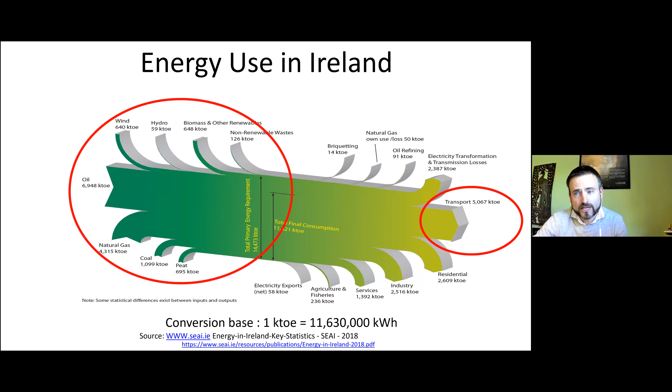Energy use in Ireland is quite stark when you look at it. This is a Sankey diagram by SEAI. Our energy inputs here on the left, and we look at oil, which mainly goes into transport. Transport of the energy sector covers about 37% of CO2 emissions. That's a lot. That's a big sector of our economy that has to decarbonize, a big sector of our daily lives that we have to develop and understand to try to get reductions in those carbon emissions.

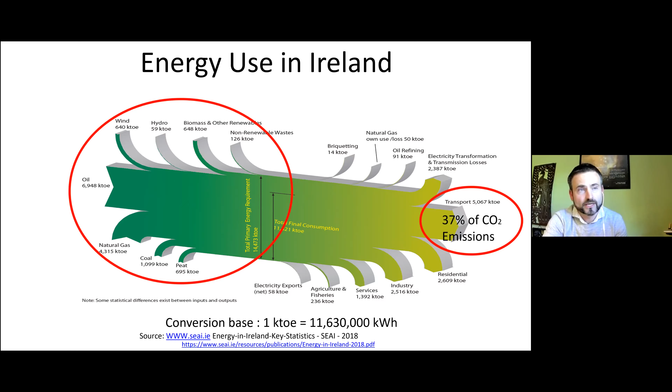Built environment is really difficult to understand because you have to think about your home and the expense and costs around that. But transport, even as an individual or as an engineer at any level of society, it's also kind of a little bit 'will I just change my car to something that's a little bit better?' I want to tease out that expectation here today a little bit, and look at what we could do, should do, and see if you agree with me and maybe have a bit of discussion around it.

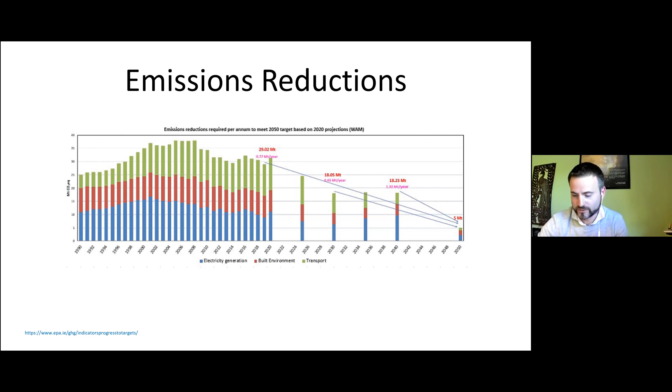This is what I want to really get through: tailpipe zero emissions is important, and then life cycle low emissions, or as low to zero as we can, is important. So we're aiming for an A0, it's called, in relation to a CO2 band in a vehicle, we'll say. And if you look at an A0 band, the only options you have are hydrogen and electric.

Interestingly, both these vehicles that you see in front of you here - the one on the bottom is the Toyota Mirai that I drove just before lockdown, actually, in the Netherlands, filling it up with hydrogen as I was on a 150-kilometer drive around with a colleague in it. And the car up the top, the electric vehicle, is my own vehicle. It's a Hyundai Ioniq, fully electric.

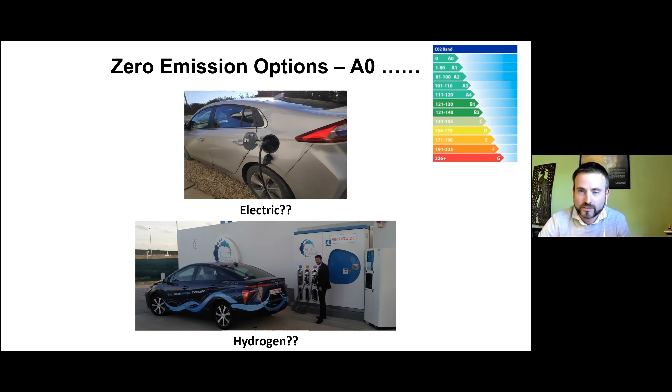So let's dive in, and we're actually going to look at electric vehicles first. From a market point of view, Ireland's actually not bad. Usually we're at the bottom 10 in the world or something, but actually in relation to market share in 2019, Ireland was quite good in relation to the amount of electric vehicles sold within our market.

We're nowhere near the likes of Norway, but every other Western European country is fairly similar. However, we have a very small population, a fleet of about 2 million passenger vehicles. So from a global percentage of amount of vehicles, we're actually very low because other countries are bigger and have a lot more vehicles. But from a market share, we're quite good.

So to date, about 9.5 million electric vehicles are on the roads, and 2.3 million of them were sold in 2020. Actually more than half of that number, 1.2 million I think, was sold in China alone in 2020. So these are the numbers you're working with.

Now let's put that in perspective. The global fleet of vehicles is about 2.2 billion. So electric vehicles are very small and are pretty much doing zero impact today, and probably won't do much impact in global emission terms from a vehicle point of view.

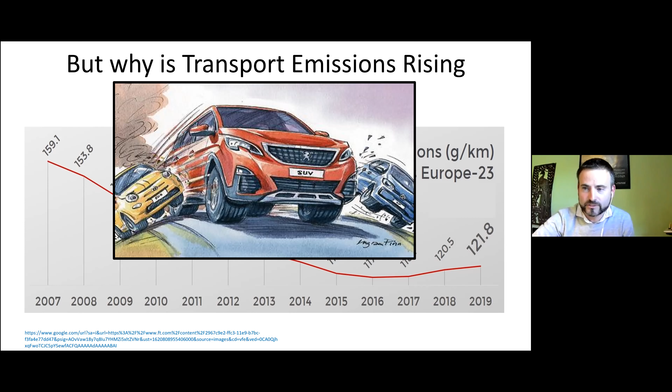So let's look at hydrogen. Now, the interesting thing with EVs that I looked at was EVs, electric vehicles, battery electric vehicles, mainly focus on passenger car market. And the transport system is way bigger and way wider, and we're more diverse than just passenger cars. So hydrogen always tends to widen that net, and it focuses in on buses, trucks, and passenger cars and logistics vehicles.

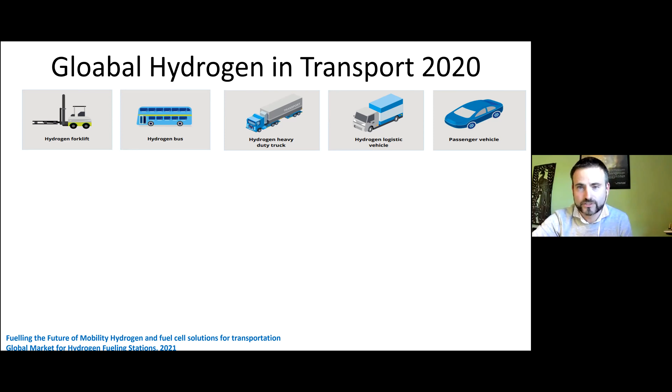Interestingly, globally, there's less than 600 hydrogen fueling stations across the world in 2020. And again, you could name, or I can name the countries: California, Germany, South Korea, China, Japan, and maybe somewhere next will be UK and France and other countries, Austria, have the fueling stations. And then there's a splatter of fueling stations across many other OECD countries.

But actually, if you look at the numbers of vehicles on the road, well, they're very, very small. We thought that 9.5 million EVs, battery electric vehicles, was small. Fuel cells are tiny - so you have 15,000 vehicles, again, mainly sold in the countries I mentioned, about 2,000 buses, mainly in China, and 1,500 trucks, mainly around Europe and China. And 30,000 forklifts, actually mainly in the US, believe it or not. So it's kind of interesting to see that the numbers are really small.

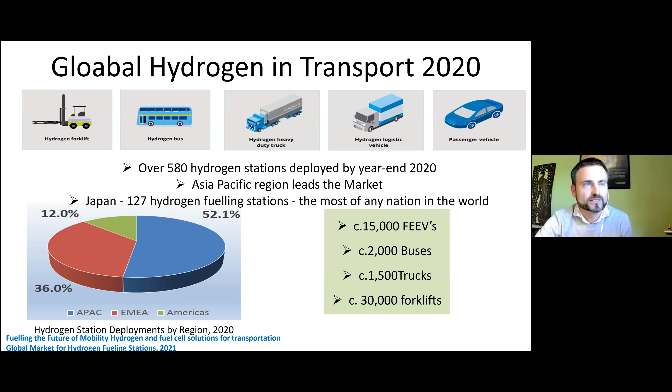And we can have the discussion around costs of hydrogen later if that's of interest.

So hydrogen going on to 2030, well, there's lots of stuff being planned. If you look at everything, between all the plans coming together across different countries and regions - US, Europe, China, and Japan - there's lots of vehicles aiming to come on. A lot of them are passenger vehicles, but there's a lot of buses, trucks, and trains all set to grow in the market, take up market share. If you fueled all these vehicles that have been pledged by these countries up to 2030, you'd effectively equate to half of Ireland's entire carbon emissions reduction across the world, assuming your hydrogen's green.

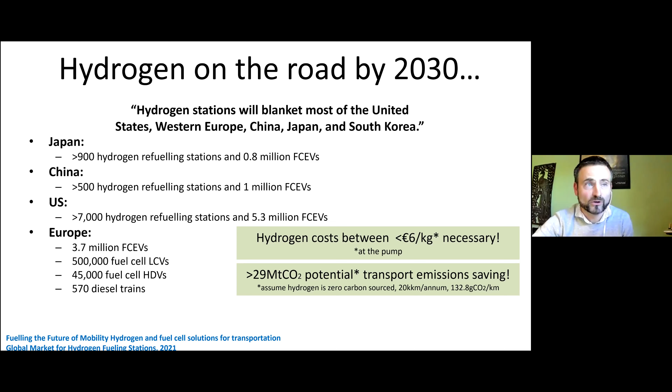And for the sake of conversation, I will be assuming all the hydrogen is green in my conversations from here forth.

So let's look at the hydrogen electric vehicle market in Ireland. Well, there was none in 2018, there was none in 2019, there was none in 2020, and we don't expect any in 2021.

So what we do expect in hydrogen is that cars isn't actually the focus. This is the whole idea I'd like to have a debate around today - is actually decarbonization the idea. And if you want to decarbonize, should we concentrate on Ireland's 2 million car fleet, or should we concentrate on the 100,000 trucks that create 25% of the 37% emissions in the transport industry? So I think from a decarbonization point of view, we need to decarbonize the heavy goods vehicles and reduce the amount of vehicles in our fleet.

So where we see hydrogen vehicles certainly is buses, trucks, and fleets of cars - not necessarily individuals driving cars, but fleets of cars are certainly a road where hydrogen should go.

So again, for the policy people in the room, what should we focus on? Well, when you look at the array of transport in our society, a key thing is the normal thing of decarbonization - that's the only thing we need to think about. And the things we should focus on are the things that don't have carbon connected to them - active travel, electric scooters, electric bikes, and active mobility.

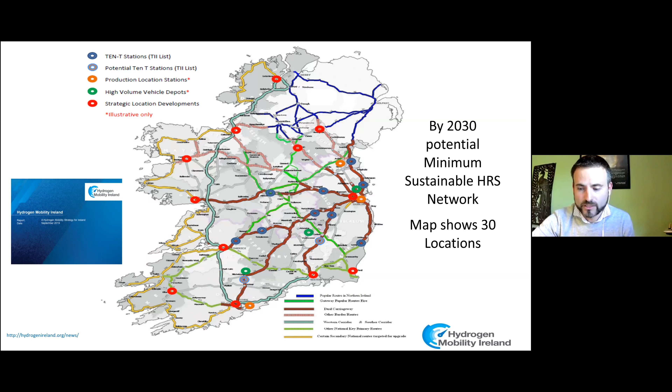What we've done is we've engaged with a lot of the truck industry in Ireland, and we've asked them a number of questions around zero emissions vehicles, or as you transition to zero emissions, what are your highlights. It's very funny - the truck industry is very pragmatic. They don't really care, is the short answer, as long as it works with their system, and their business can continue and even flourish because of their investment in the vehicle.

Now there's obviously a few caveats there - the vehicle cannot be too expensive and the fuel cannot be too expensive. But certainly what we see is that things like support, reliability, sustainability, backup supports, and the availability of the fuel are already more important than even the cost of the truck. So these are interesting anomalies, very different than an individual person buying a car - if you want to buy a passenger car, you usually look at where you put your coffee cup, and whether there are heated seats.

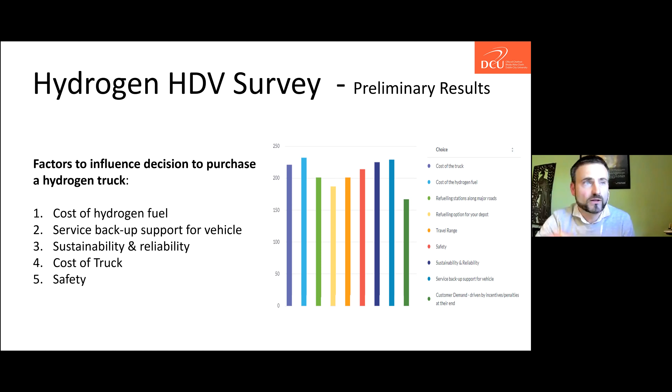Whereas heavy duty vehicle operation is very different, and it doesn't really matter if battery electric vehicles are available - that's what they should go for. But if they don't suit their range or logistic requirements, it makes sense that they'd all automatically flip to hydrogen once it's available. The other barriers people perceive for hydrogen are the cost of purchase of the vehicle, and vehicle performance and reliability question marks.

We're seeing this already in the UK, certainly in Northern Ireland, and in rollouts of bus projects across Europe and truck projects across Europe and even New Zealand. At the moment in 2020, 2021, there's only a few OEMs making these vehicles, but as I read in an article this morning, this decade is going to be the boom for zero emissions trucking, across both electric and hydrogen, which is really good.

Again, don't be biased, just buy the right one for your business. Other things, like all good truck companies need, are purchase grants. The question is you want to bring down a vehicle to be on par with an equivalent diesel vehicle, you want the motor tax to be equivalent, and you want fuel cost support. If it's too high, it won't be suitable for the business, so you need support there.

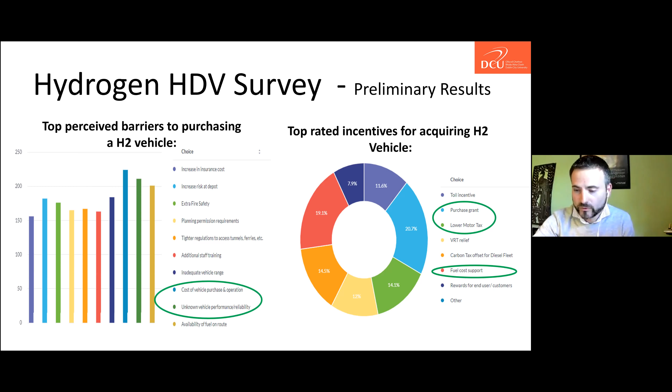So those are all interesting insights we saw from the survey, and we'll be publishing this and it'll be freely available for people to interact with over the summer.

So where are we going with Ireland, and what are the steps of what's happening and what should we do? There's a few things happening around Europe that we should maybe recognize and engage with, and that's the banning and decline of fossil fuels. This used to be decline of diesel, but now I've changed it to decline of fossil fuels. So the question isn't even whether my next truck purchase will be diesel or zero emission.

The question trucking and HGV companies are asking is: we are moving to low emission vehicles, what options do we have, can we start planning it? We're still a bit late, but it's good that we're having those conversations, and I think it's important to see where we are.

We need to plan today so that our fleet of vehicles - our dirtiest, heaviest, most fuel intensive vehicles - are decarbonized as soon as we can. So is there an opportunity, not to ban, but certainly to have zones of fresh air in our cities? That's an option some cities across Europe are looking at.

And then the EU Clean Vehicles Directive is a really good mechanism to ensure our public sector vehicles can be zero emission, and our public sector should lead. No one's going to buy a low emission vehicle and help decarbonize and pull their weight as a good citizen if public services and public sector bodies are driving around in diesel guzzling polluting vehicles. So the public sector must lead, and public transport must go zero emission and pull more people onto this to make our cities and towns cleaner.

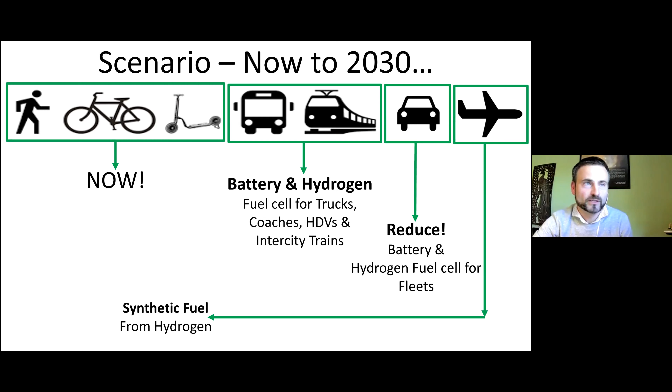What I ask my students in one of my modules is, imagine it's 2070, what airplane is flying overhead? And a lot of them go, it's a very difficult question, because it won't be emitting fossil fuels or emissions. So what I'd like to have the discussion points around is, from all intents and purposes, transport needs to go to zero. And whether that's reducing the numbers to zero or reducing the emissions, it doesn't actually matter, but probably a little bit of both.

We need to focus on heavy duty vehicles, trains, buses, and public transport for a number of reasons. Carrot and stick - it's time for the industry that have HGVs, trains, buses, and public transport to engage with, to have the supports available for them. But also, if they're not complying, that needs to be managed. And then behavior change in society has to happen. There's no free lunch with climate change and the energy transition that we're in.

And the transition we need in our society - we're a first world country, part of the European Union - we have to facilitate a just transition for our society. That means we have to support rural areas that don't have public transport. We need to put in public transport, and we need to ensure that their transport is low emission or zero emission, as much as everyone else in the country. So on that point, I'll leave it and take questions from the floor. Thank you.